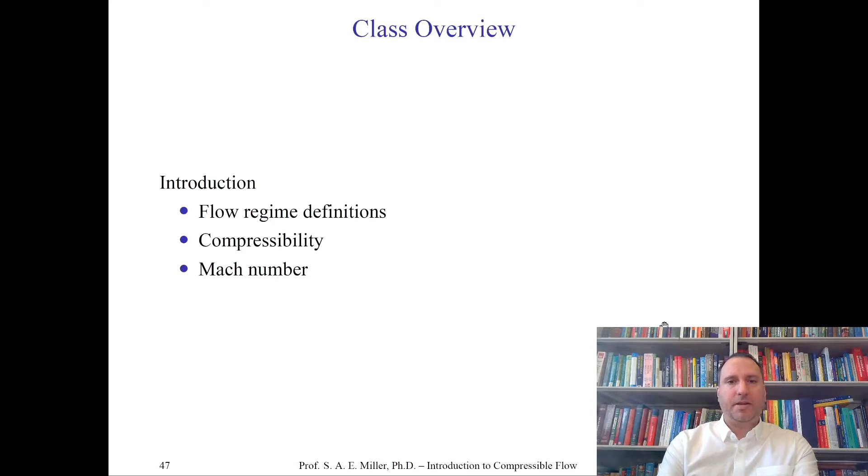It's always fun to start with a quote. Here's another one from Da Vinci, as I showed earlier. He wrote in one of his notebooks, 'Before writing on winged creatures, make a book on insensate objects that descend through the air without wind.' In other words, the laws of gravity and falling bodies. And another on those that descend with the wind, in other words, the laws of air resistance and aerodynamics.

Da Vinci was, of course, a genius, and he saw then that he would try and so-called divide and conquer a problem, to study its elements and assemble it into something more complicated. This is very much like what we're doing in this class, that we're looking at elements of very complicated flows and to understand them as a system of fluid dynamics.

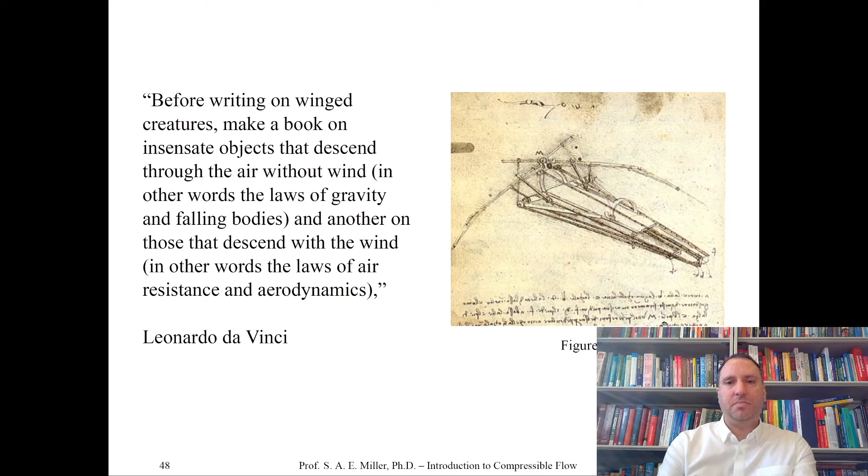So let's start at the beginning. This is a little bit of a review for some of you, and that's okay, but I'm trying to bring everybody to the same page. We first might ask, what is a fluid? Well, a fluid in this class, and most people would agree, is any substance that deforms continually under a shear stress. So we take any substance and shear it, and it will continually deform. This is what we call and consider a fluid.

Generally, there are three states of matter, in the classical sense at least, that we consider a fluid: liquids, like water; gases, such as nitrogen gas or air; and plasmas, which is perhaps a gas heated enough for the state of matter to form and for the gas to disassociate. In this class, we'll mostly look at gases. We will not be looking at plasma dynamics. We very seldom will look at liquids because the compressibility of liquids is so small. The compressibility of gases and plasmas is very, very high. So compressibility effects in gases and plasmas are high, and therefore we're going to focus on them a little bit more.

Most liquids will show almost no change in density with changing pressure. We note this from experiments, and we'll see why momentarily. For this reason, we consider, at least in engineering contexts, liquids to be rather incompressible for practical purposes. For example, if we're doing calculations, we might just assume that the density is not varying within the flow field. We would call this, in a casual manner - not the strictest definition of compressibility, which we'll talk about later - that the flow is incompressible. And that's a wonderful assumption because we can reduce the number of equations we're solving for, thus reducing the complexity of the problem. Compressible flow needs a greater insight into the problem because density varies in the flow, and we have to account for that as an unknown variable.

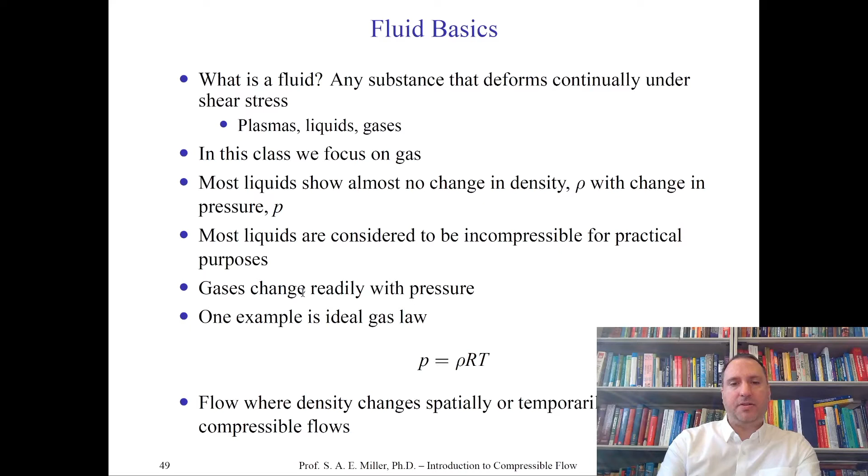Now, unlike liquids, gases readily change with pressure, P. This is something we're observing from experiment. If we can model a gas with the so-called ideal gas law, which I show in equation 1 - and all equations are numbered in this class - we can write it as P equals rho RT. Then we can also use this gas law for many other fluids. But you have to know when it breaks down. Remember, the gas law is for ideal gases, and it is a type of assumption. So we'll look at some of the validation and ranges where these different gas laws work well in this class.

So here we say the ideal gas law, which I think almost everybody's seen at some point in their career up to this point. If not, here it is. I think it's usually introduced in chemistry: P, the static pressure, equals rho, the static density, times R, the gas constant, times capital T, which we'll call static temperature.

I'll talk about static, total, and stagnation values later. Just know that P is pressure, rho is density, R is gas constant, and T is temperature. P equals rho RT - it's an equation you should remember.

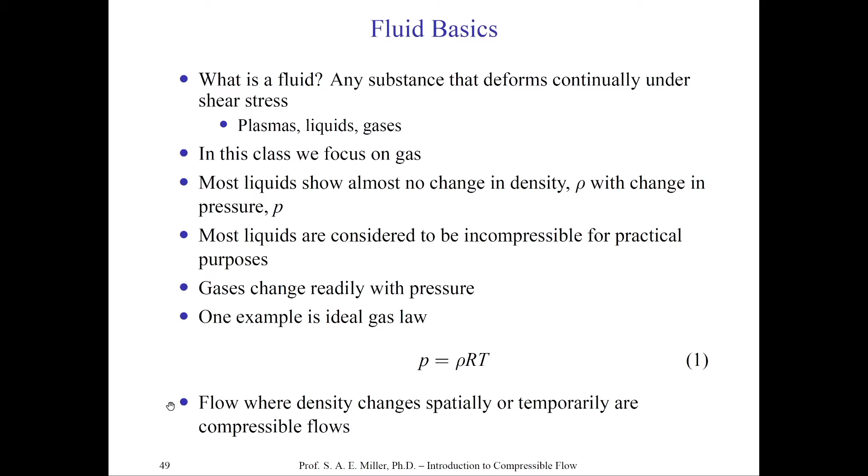Let's talk about what compressibility is. For now, we'll call compressibility and quantify it as tau, the Greek letter here. Don't think of tau too closely as compressibility in the rest of the class - it's just the formal definition here. We'll call tau as compressibility.

We'll also use tau as shear stress, which we'll also show in this introduction module. So you'll know tau as shear stress or compressibility by the context of the problem and the equation that's used. Why do we use the same variable for two different things? Tradition - it's because these two communities that studied the fundamentals of gases and fluid mechanics and dynamics came together, and they both were using tau. Neither one gave way, so we'll use tau twice in this class for two different things. It should be obvious to you which it is.

Let tau be equal to negative 1 over V times dV dP. I've already defined P as the pressure, and tau is compressibility, but V will be the volume. So the compressibility of a fluid will go as the negative of 1 divided by the initial volume, times the change in volume divided by a differential change in pressure.

So if we apply a little positive pressure, get a little positive differential, what happens to the volume? Change in volume dV, so it's dV dP - that's just a normal derivative. In this class we'll see normal and partial derivatives. You should understand already what a derivative is from your calculus sequences, and I'm sure they briefly talked about a partial derivative, and we'll briefly review that if you don't recall this.

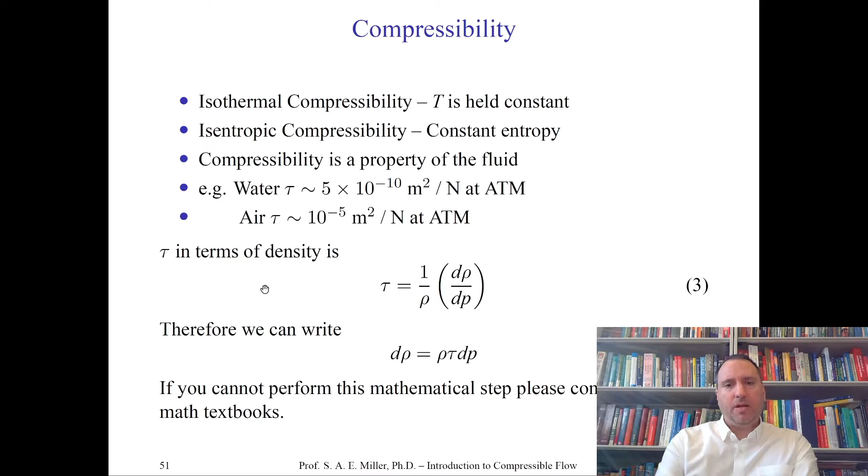We can also take equation 2 and write it in terms of density. That'll be tau equals 1 over rho times d rho dp. You can try and work out these two values yourself. This is a little easier to work with, but we have a differential form.

What if we try to move d rho to one side and dp to the other? We'll find this nice differential equation: d rho equals rho tau dp. Recall that d represents the differentials, rho is density, p is pressure, and tau is compressibility. We get d rho equals rho tau dp, equation 4. If you don't see these mathematical steps, please look back at your calculus book and your basic thermodynamics books, and you'll be able to make this exchange from equation 3. I urge you to try these mathematical problems on your own—it's the only way you're going to learn, understand, and remember it yourself.

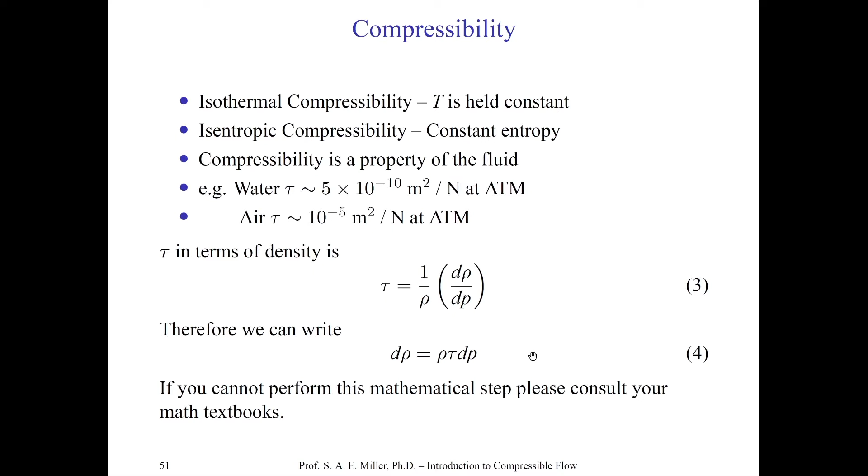Let's next look at some pressure gradients, and keep in mind these compressibility terms—they'll come up later in your homework problems. Think about how pressure gradients might change the density in the flow. Remember, the equations are linked, as we'll discuss in the next class, through a system of partial differential equations which relate pressures, densities, and temperatures to the velocities—closed by the ideal gas law. For now, let's look at some physical observations of pressure gradients in particular flows.

First, we note that most flows, especially of aerospace interest, contain pressure gradients—that is, there's a change of pressure as we move through space and time. In this case, I'm thinking in particular about how pressure changes in space. Many aerospace-type flows are driven by pressure gradients, as happens for rocket engines and wind tunnels. I'm sure you can think of other cases where a flow is driven by a pressure gradient. Then think about flows, perhaps in nature or in our lives, which are driven by, say, temperature.

Now, strong pressure gradients will create density changes, especially for a flow with high compressibility—it'll be much more susceptible to these types of changes. These density gradients become larger and larger, and we have to account for them in our calculations. This is the central thought of compressible flow theory: how we account for these density changes, which are so apparent and large in high-speed and complicated flows.

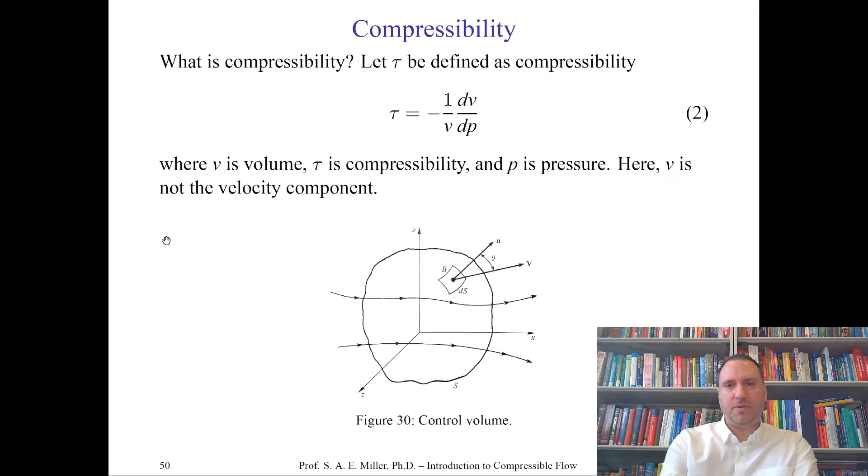Now, this is not the case in an incompressible flow, where there are pressure gradients, but the density is almost invariant, or completely invariant. Mathematically, we could just say the density is a constant, simplifying our equations like you did in your fluid dynamics or introduction to aerodynamics classes. So we could say density is a constant and not worry about the changes of pressure with density, as we showed in equation 4.

If we consider a portion on the right-hand side of the momentum equation—and you should have derived the momentum equations for fluids in your previous class, we'll review them next class—you'll have one particular term on the right-hand side. This is what's used to drive the flow. You can think of it as a type of inhomogeneous or forcing term in the equations of motion.

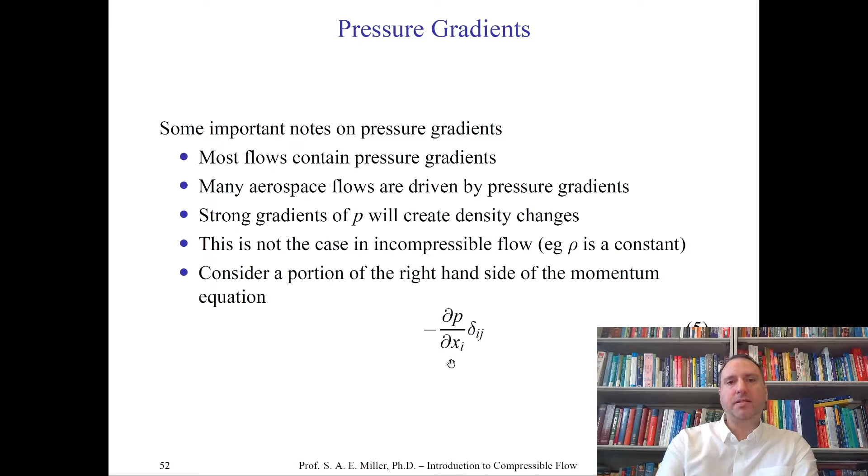Let's look at this form here. We have a negative sign, and then our first instance in this class of a partial derivative: partial p partial x sub i. P is pressure, and this symbol in front of the p is the partial symbol, so this is a partial derivative with respect to the x sub i direction. If we're in 3 directions, i would be 1, 2, or 3 for the x, y, or z direction respectively.

Then you see this curious character here. On the class website I've uploaded notation for index notation. This is delta sub ij, where i and j are the indices of this particular term in the equations of motion. Here i varies from 1 to 3, and so does j. When you see two i's, we sum them. For example, this term would be negative partial p partial x1 delta 1j minus partial p partial x2 delta 2j minus partial p partial x3 delta 3j.

Then we would set j to be the x, y, or z direction. So for example, in the x direction of the equations of motion, we have negative partial p partial x1 delta 1,1 minus partial p partial x2 delta 2,1 minus partial p partial x3 delta 3,1. This delta sub ij is called the Kronecker delta function—it's 1 when i equals j and 0 otherwise. So in the x direction in a 3-dimensional system, we would have negative partial p partial x times 1. Partial p partial y and partial p partial z would essentially be 0 because the Kronecker delta function would be 0.

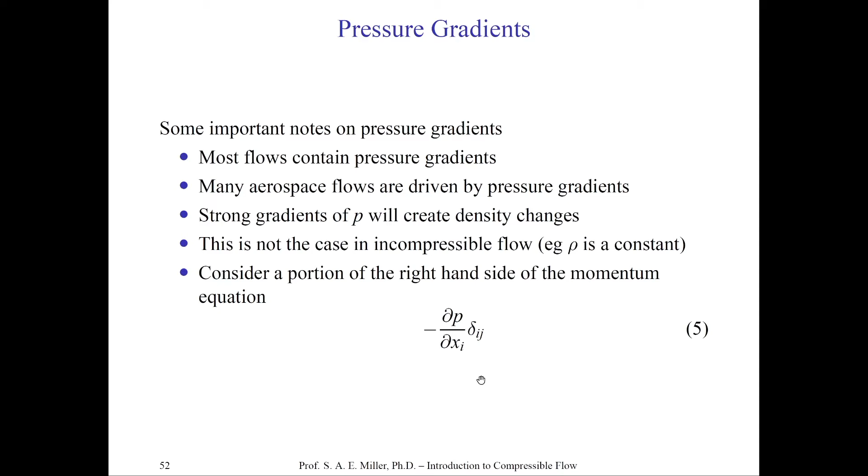Let's next look at Mach number. Let's define Mach number as shown in equation 6. We'll call it M, Mach number in this class, with subscripts to denote what kind. It's defined in general as the velocity of a gas divided by the speed of sound. Mach number can be defined as any type of velocity, typically of a fluid, divided by some reference velocity. We'll call the gas velocity generally a vector or value u, a velocity usually in the x direction, divided by the local speed of sound c.

Now in this class we will usually call the speed of sound c, but some people prefer to use a. Either way, we'll concentrate on this definition—I try to usually use c. So when you see c, think speed of sound, and it's the local speed of sound. For example, in some flows, since density and temperature change, temperature is very much related to speed of sound—in fact, the speed of sound goes as temperature to the half power in ideal gases. So our Mach number goes as u over c, remember that. Here u is the velocity and c, or a, which we can use interchangeably, is the local speed of sound.

Now if I add an infinity in the subscript to M, I call that the global Mach number. Say we have an aircraft flying through the atmosphere—far away from the aircraft is the global Mach number. The global Mach number is also considered the aircraft Mach number, which would be the speed of the aircraft divided by the ambient speed of sound—the speed of sound very, very far away from the aircraft.

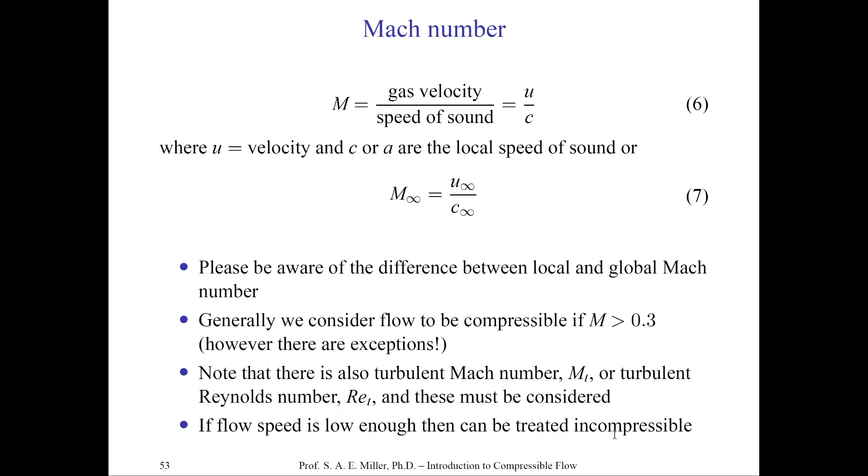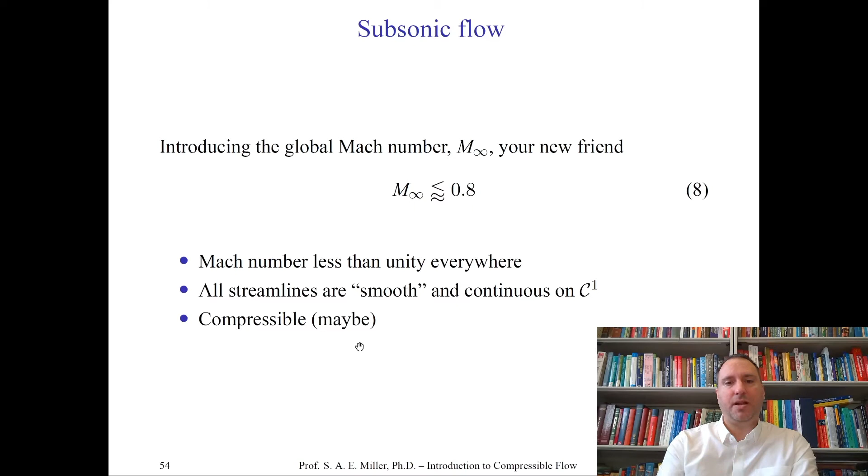Now let's look at some flow regimes. This is fun. For subsonic flow, the first flow regime - these are rules of thumb, not hard cutoffs - as a global Mach number, say we have an aircraft flying lower than Mach 0.8. So if we have a Mach 0.4 global Mach number aircraft, you can probably treat it as subsonic flow, but it could still be compressible. So you can have compressible subsonic and supersonic flows. If we find the flow field solution around such a vehicle, we could say that the Mach number will be less than unity everywhere - that is, M is less than 1 everywhere. If we plot the streamlines of that flow, remember these are lines parallel to the vector field, they will be smooth - their first derivatives will be continuous. Remember, these flows can be compressible or incompressible. We'll look at examples of these soon.

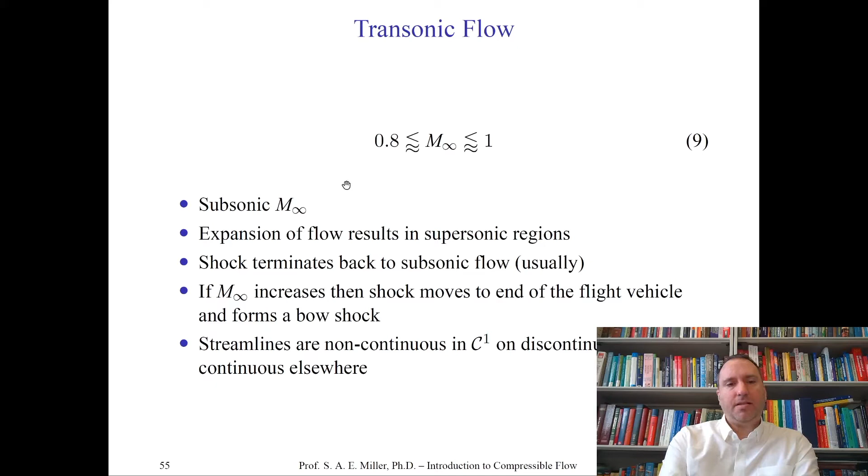Let's look at a transonic flow next. A transonic flow might have Mach numbers in the rough range between 0.8 and 1, where the Mach number everywhere is in this range. It's also considered a subsonic flow - that is, we'll find a subsonic M infinity, where the global Mach number of the device flying through the gas is less than 1. But there could be regions of the flow which are supersonic, meaning M is greater than 1, and we could see shock waves starting to form. A transonic flow is usually an incoming subsonic flow which accelerates to be supersonic, and terminates and returns to subsonic flow through weak shock waves. Now, if the Mach number increases more, the shocks will move to the end of the vehicle and form bow shocks, like we showed in the introductory first class when looking at simple visualizations of Schlieren. You also find in a transonic flow, unlike a subsonic flow, that the streamlines are non-continuous in their first derivative, and at their discontinuities, they turn abruptly.

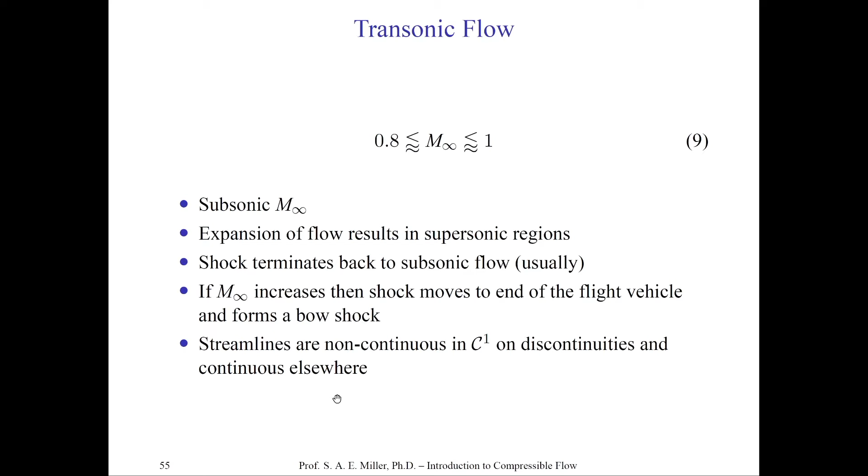Streamlines are non-continuous on particular flow phenomena, like a shock wave, and continuous everywhere else. This is just a general definition in transonic flow, and we'll talk more about the mathematically rigorous definition near the end of the class. For now, just try to get an idea of what the flow regimes are.

Next, we have supersonic flow, where M is greater than 1 - that's the global Mach number, M sub infinity, greater than 1. So if a flight vehicle is flying at Mach 2, we'd say M infinity equals 2, which is greater than 1, therefore it's supersonic flow. Here the flow everywhere is greater than 1, but this isn't a rigorous definition, because a supersonic aircraft could be flying at Mach 2 and have subsonic flow in regions around it. We'll just generally call this a supersonic flow regime. These are not hard cutoffs, just rules of thumb to describe types of flows, and we'll use them throughout this class. This is the language of the field.

What makes supersonic flow unique is that everywhere in front of the flow will be unaware of the shock. This is what we call a hyperbolic type system of equations, where information only travels in one direction. The flow will be unaware of shock waves until it arrives there. You'll see this more in our mathematics through the class. If you don't completely understand that point for now, it's okay.

Flow after the shock wave could be very much aware of it, since it went through it, but it could also be subsonic or supersonic after a particular shock wave. We'll look at these in the shock wave theory part of the class. There are tremendous mathematical difficulties when dealing with supersonic flow relative to subsonic flow, because of these discontinuities in the solutions and the fact that they're shock waves.

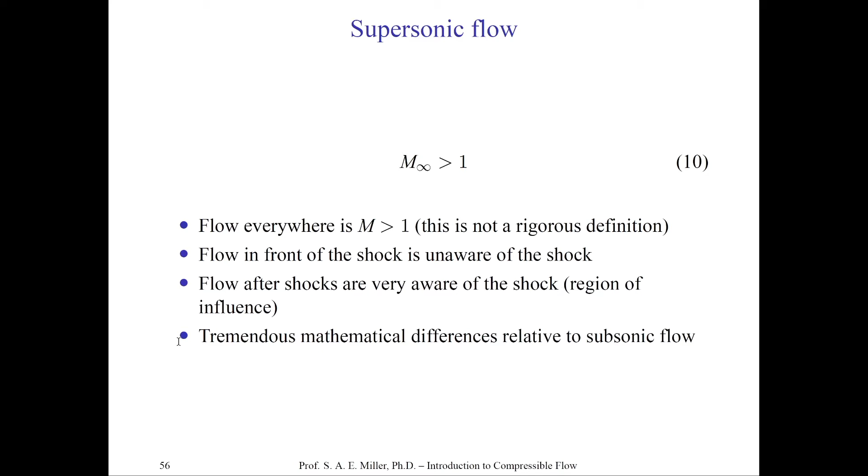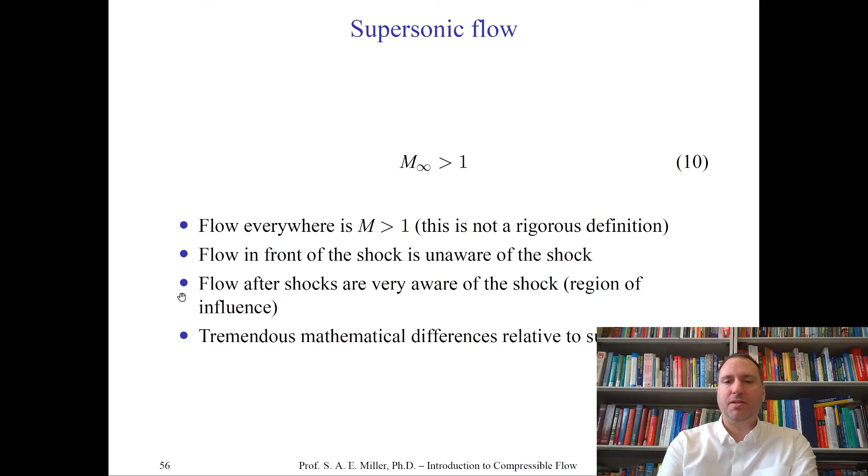Compressible flow theory in this class will be simplified, and some students might think handling supersonic flow is less complicated than subsonic flow, especially if it's incompressible. I assure you this is not the case - unique flow phenomena happens in compressible flows that does not occur in incompressible low-speed subsonic flow. So generally, supersonic flow will be that flow which has a global Mach number greater than 1 and has these general properties, but these are rules of thumb, not a rigorous math definition.

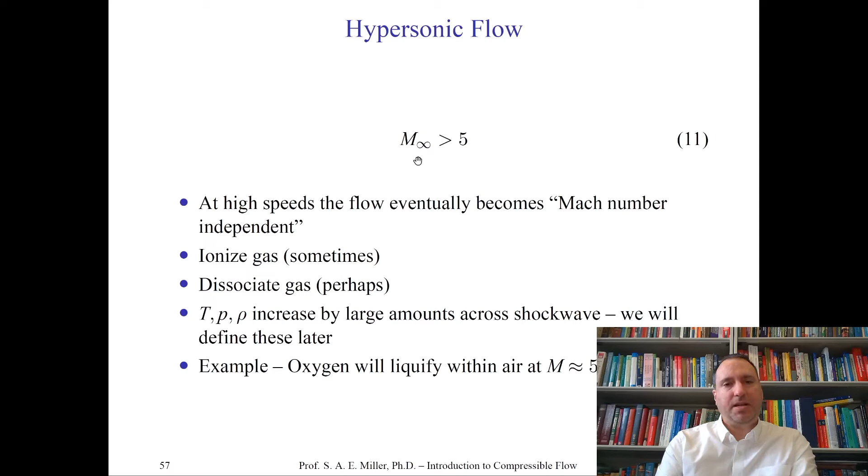Just learning language. Finally, when a vehicle, like a reentry vehicle in the atmosphere, reaches a very, very high Mach number - say at least 5 or larger, that's the community standard - if the Mach number is 5 or larger, we call that a hypersonic flow. So M infinity is greater than or equal to 5. At these high speeds, eventually the flow becomes Mach number independent, and we'll look at Mach number independence later in the class.

Remember, we can use Mach number, a non-dimensional number, to characterize flows and try to non-dimensionalize the solutions and collapse them to find similarities. These break down, and Mach number becomes useless at very high speed hypersonic flows.

In hypersonic flows, if you have high enough Mach number for a particular vehicle shape, the gas may ionize and the gas may dissociate - like the space shuttle reentry you saw earlier. Plasma dynamics is also important in, say, fusion reactor designs, for example from ITER, the Department of Energy. It's a very interesting field. We will not be looking at plasma dynamics in this class, but it's a wonderful research area to go into, especially if you're scientifically and mathematically minded.

Plasma also occurs in both aerospace engineering and other fields. One thing you'll notice in a hypersonic flow is the static temperature, pressure, and density increases by huge amounts across a shock wave, and we'll define these increases later. In any shock wave, you'll notice the temperature T, the pressure P, and the density all increase - these scalar thermodynamic values increase immensely across shocks. We'll find mathematical solutions for these in this class, and I think you'll find it quite elegant.

One example of a hypersonic flow which gives people great difficulty is that oxygen will liquefy from air near Mach 5 in a wind tunnel. So if you're doing wind tunnel experiments at Mach 5 or greater, you can expect to have these types of difficult effects to deal with.

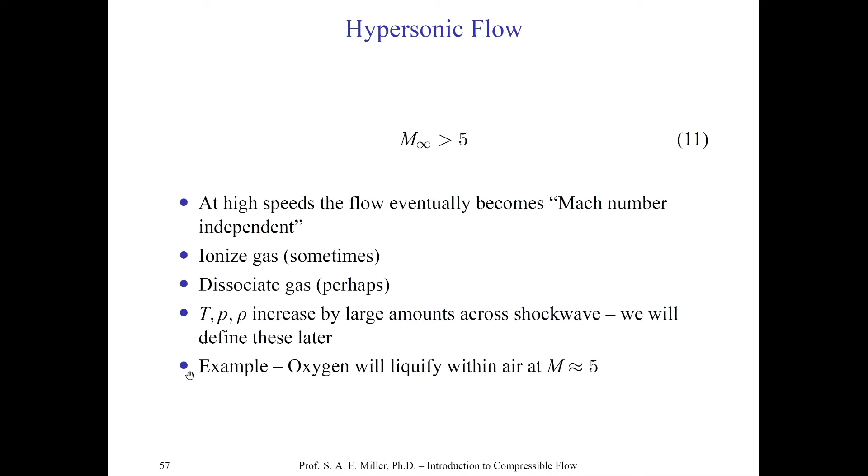The last flow regime I want to talk about today is the so-called hypervelocity flow. This is where you have a Mach number of 20 or greater, anywhere in 20, 25, and greater. The shape of the vehicle will also come into play here, as you'll see later near the end of the class, for what we call hypervelocity flow. But it has these general characteristics.

One, the flow will be rarefied, and we'll talk about what that means soon. The continuum assumption breaks down, meaning we can no longer treat the fluid, in this case a plasma or gas, with standard mathematical assumptions. The Navier-Stokes equations become invalid, though they could still be good approximations. In this class we're assuming mostly continuum phenomena, non-rarefied flows, but for rarefied flows we need special tools, through the Boltzmann equation and Monte Carlo type methods.

A rarefied flow is a flow where we're dealing with particles that don't have a high density and are moving very fast. We will talk about hypervelocity flow a bit near the end through the original approach to aerodynamics proposed by Sir Isaac Newton. I think you'll find that very interesting.

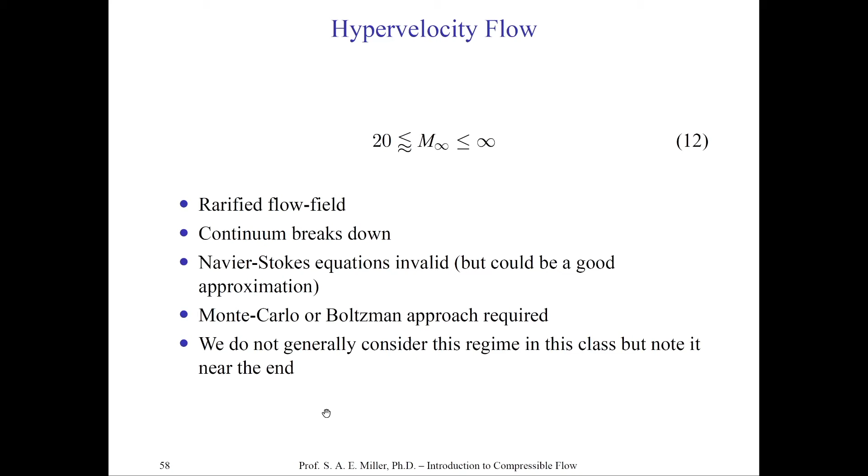Now let's look at some examples of airflow going through these different flow regimes. The first example shown is a subsonic flow over an airfoil. The airfoil, this solid body, is the outline with diagonal lines going through it, and from left to right we have streamlines. In the subsonic definition, the streamlines are continuous through the flow field solution, so at some point B we have a velocity vector which is parallel to this particular streamline.

We could draw these streamlines anywhere in the flow field if we wanted. You also see one particular streamline comes in from left to right and stagnates at the leading edge of the flight vehicle, in this case an airfoil. So flow moves from left to right, the airfoil is stationary - it's not any different than sitting in an aircraft and looking out the side of the wing.

The incoming velocity we'll call v sub infinity, the velocity of the aircraft or flight vehicle, which is the velocity of the incoming airflow. M sub infinity is the global Mach number, and it's less than 0.8, for example, for subsonic flow. Along all these streamlines the Mach number varies, but we say it's always less than 1 - everywhere in the flow field around the airfoil, the Mach number is less than 1.

This is the stagnation point, which we'll talk about later in the class. This is where the flow comes in and stagnates at, say, a leading edge. This is often one of the highest temperature points on the vehicle, which could be important at high speeds. So you'll see all the streamlines are continuous in this particular form.

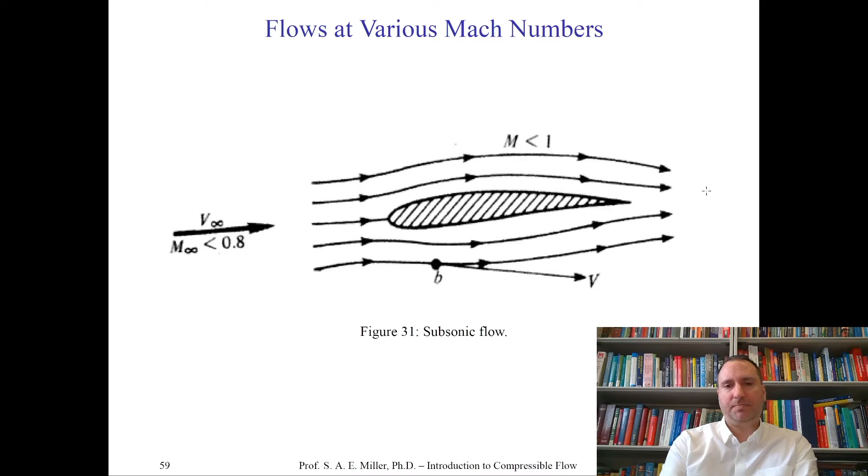But remember from your previous classes that along the streamline, Mach number actually changes - why? Because it's compressible. We're treating it as incompressible here, but let's say it's probably compressible at around Mach 0.8, M infinity. The flow will accelerate - it might be Mach 0.8 here, maybe 0.9 here, and it decelerates back behind the vehicle to, say, Mach 0.8 eventually. Still subsonic. In transonic flow, something different happens.

This is the transonic flow regime, and it's very physically non-intuitive. For this particular airfoil, the transonic regime goes from global Mach number 0.8 to 1. The flow goes from left to right, same airfoil. Along the bottom, the Mach number never increases beyond 1. But what about this streamline?

Let's say we're about Mach 0.85 here, and we accelerate, still subsonic. Then something happens at this point on this dashed line - the Mach number goes transonic, m equals 1, and accelerates to a supersonic speed. At this location where my cursor is, that's a supersonic Mach number. Then we go through this thick line here, attached to the vehicle - that's the shock wave, which we saw pictures of in the previous class.

Across the shock wave, almost instantaneously as we move from left to right, our little fluid element goes from Mach greater than 1 to less than 1, to subsonic speeds. Then we decelerate, or accelerate a little bit, but then decelerate back to, say, Mach 0.85, the global Mach number. As we change M infinity, the position of the shock wave will move around the vehicle, and it terminates so it can match the back pressure of the atmosphere and the flow. The dashed line here signifies the transonic condition itself, where m is exactly equal to 1.

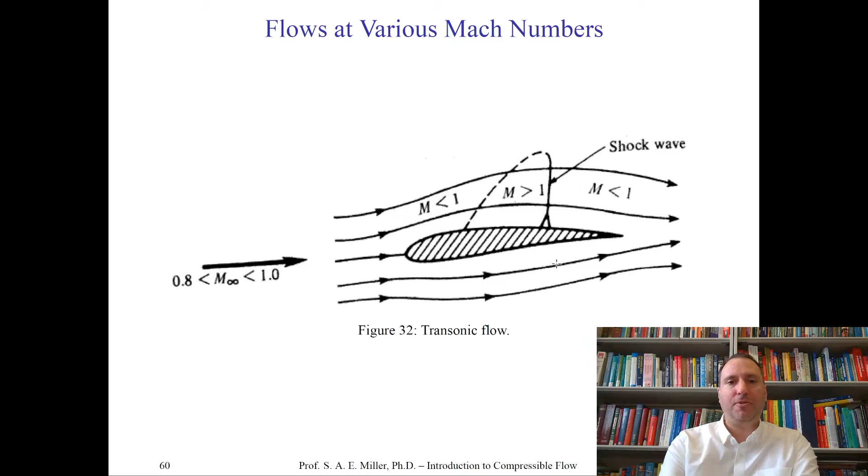Why doesn't a shock wave form on the bottom side of this particular airfoil? Well, it's the shape—this airflow down here is never accelerated to a supersonic regime for a transonic shock wave to form. This is all physical observation, and we'll talk about the mathematics through the equations of motion to explain all this. Right now I'm just trying to show flow regimes. So I'm sure you're wondering, with a lot of questions, like what is a shock wave? Why does this happen? Well, we'll try to answer these questions in this class.

Let's look at another transonic problem, and this time we'll define the global Mach number as from 1 to, say, 1.2. Here, since the incoming Mach number is greater than 1, and we do not have a pointed leading edge—the leading edge is bluff—a bow shock will form.

So all the Mach number, say here m infinity is 1.1, hits the bow shock, goes through the shock wave, and immediately the Mach number becomes subsonic. And we'll prove this to you in this class. If you go through a shock wave, your Mach number, for a normal shock at least, will become subsonic.

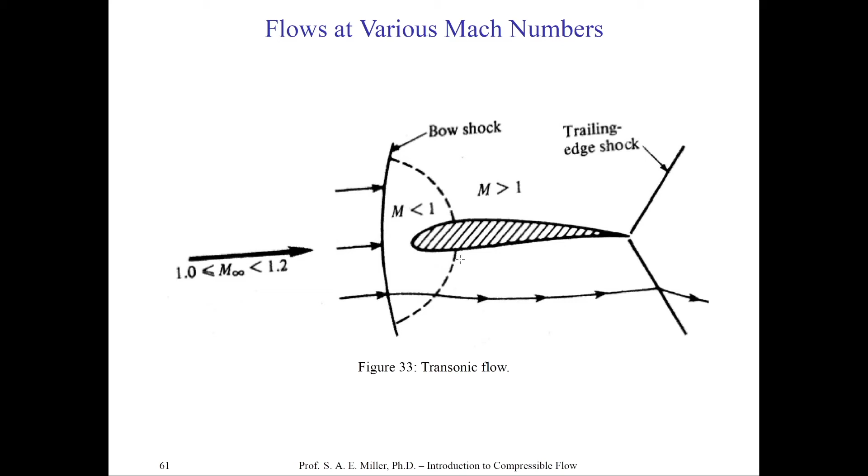The flow then accelerates around the body, becomes supersonic again, and a trailing edge shock forms at the end of the vehicle. So this is a supersonic incoming flow, but it's considered transonic. Why? Because this has transonic features of a bow shock and trailing edge shock, and there are regions of the flow which are, of course, supersonic and subsonic.

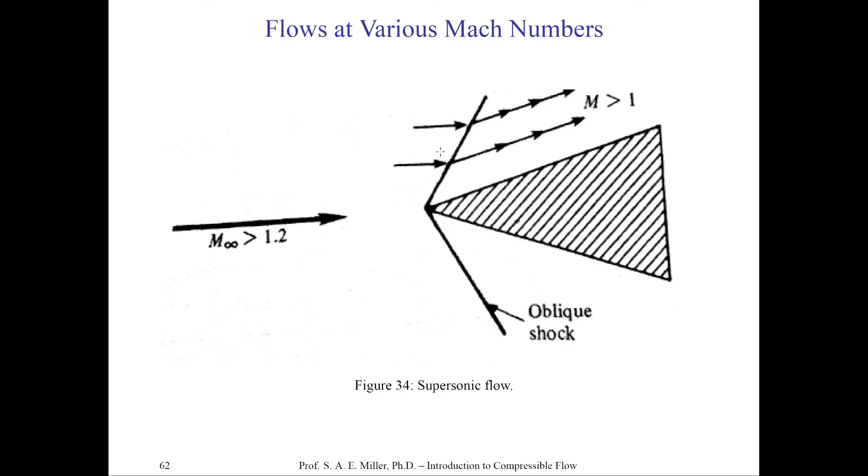But this is all qualitative, and we'll try to quantify these definitions later and put it on a more firm theoretical and mathematical basis.

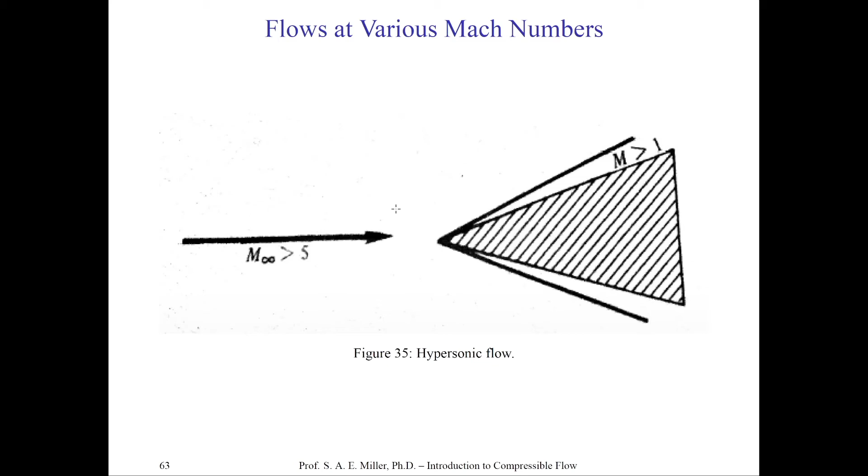hypervelocity flows, where the flow becomes rarefied, and we have to handle it with something like the Boltzmann equation and Monte Carlo type methods, which are statistical methods.

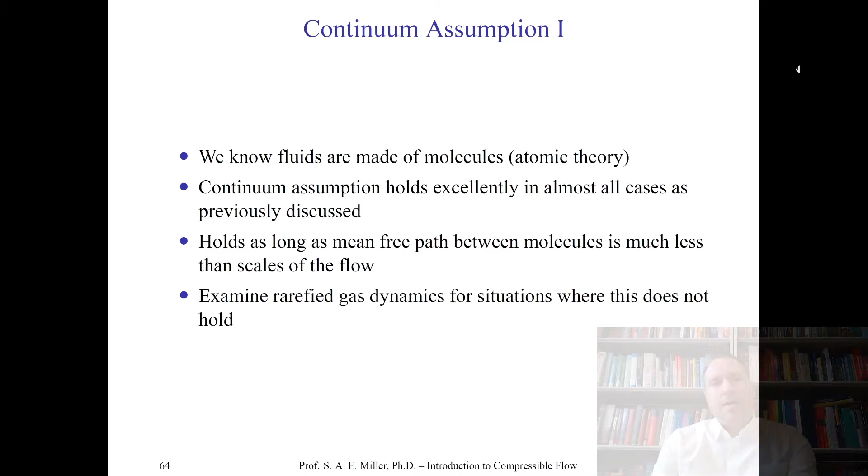The continuum assumption holds as long as the mean free path between the molecules is much less than the scales of the flow. For example, we'll estimate the scales of the flow as some distances and times—those are scales: the length, time, and velocity scales, for instance.

And the mean free path—that's the average distance between the molecules—will be much smaller than the length scales of the flow. Then we can consider it a continuum. And we'll do this mathematically in a few minutes.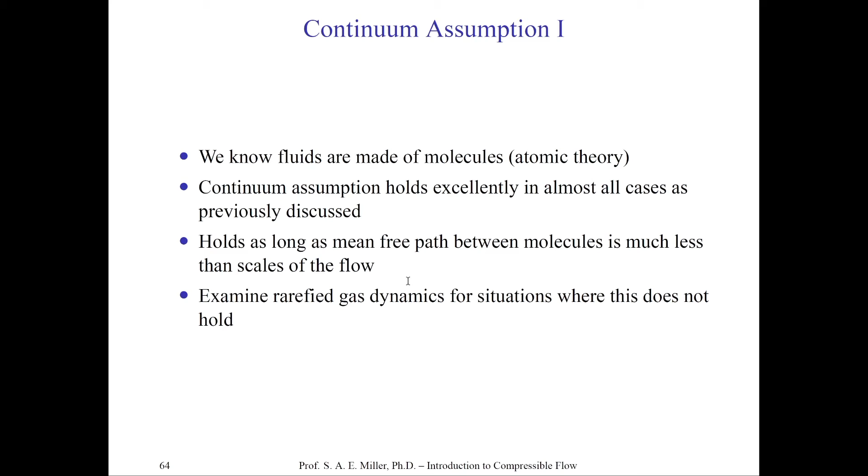We would have to look at a whole new field called rarefied gas dynamics to handle situations where the mean free path length scales are on the same order or larger than the scales of the flow itself.

Now, most aerospace flows that we'll consider are considered to be Newtonian. Here we'll define this relationship. This is unlike the compressibility equation which we introduced earlier in this class.

Here we'll say tau is a shear stress, the shearing of the fluid, and a fluid deforms continuously under shear. This will be approximated as the viscosity times the derivative of u with y. This is a simple definition, not the full shear stress tensor, just for observation.

Newtonian fluids, liquids, gases, or plasmas, are defined where the relationship is linear between the shear stress and the viscosity, and of course, the shearing of the fluid, du/dy. This is a derivative of, say, u, the streamwise velocity, in the cross-stream direction y.

Mu is a constant in this case, but it's often good to say there's a model for mu, which is viscosity, which goes as temperature. So it's like Sutherland's law.

Now, non-Newtonian fluids are much more difficult to handle. Can you think of some examples of non-Newtonian fluids? Two would be, say, honey or ketchup. So in our everyday lives, when we're dealing with honey or ketchup, we're dealing with non-Newtonian fluids.

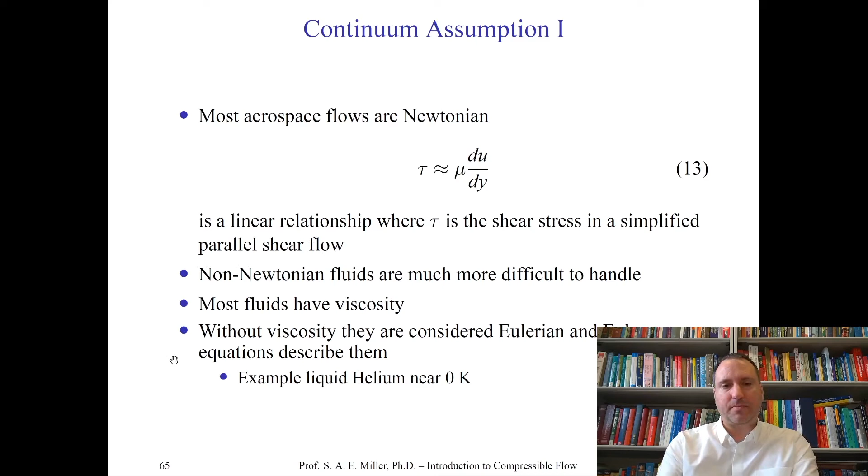His title, Kelvin, which is also a unit of temperature, is named after the River Kelvin, and you can use Google Maps and look at it yourself if you wish. It flows by his lab at the University of Glasgow. Can you imagine being referred to as Baron Kelvin, named after a nearby river? You can probably think of some examples right here in our state. He wrote over 650 articles and 70 patents. That's an amazing amount of productivity.

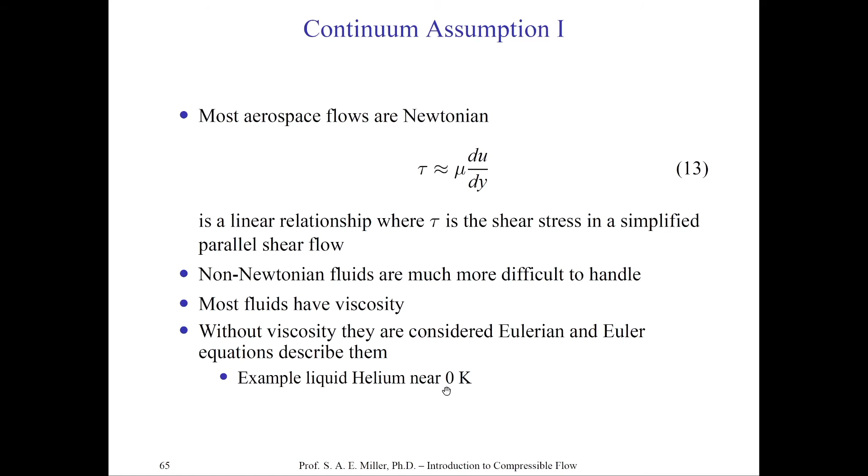He has an interesting quote, which I'll stop and share to take a break from the technical material. He wrote: 'In physical science, a first essential step in the direction of learning any subject is to find principles of numerical reckoning and practical methods for measuring some quality connected with it. I often say that when you can measure what you are speaking about and express it in numbers, you know something about it. But when you cannot measure it, when you cannot express it in numbers, your knowledge is a meager and unsatisfactory kind. It may be the beginning of knowledge, but you have scarcely, in your thoughts, advanced to the stage of science, whatever it might be.'

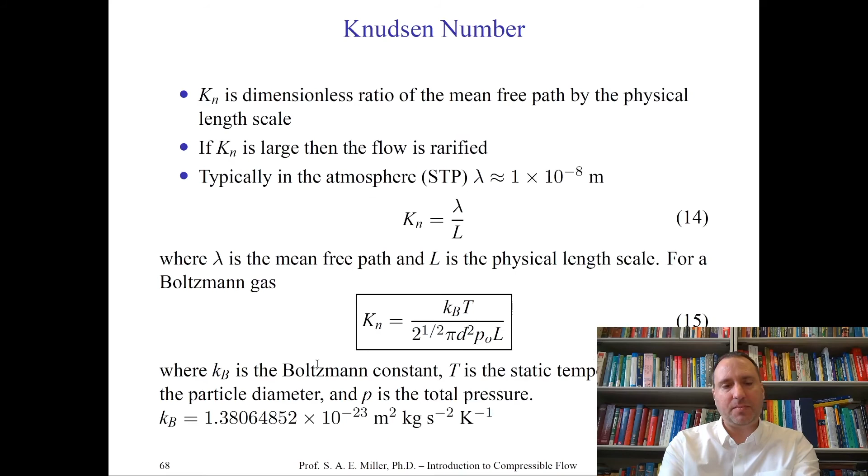Let's start with this quantification with the Knudsen number, named after another famous person. We'll call it Kn. Kn is a dimensionless ratio of the mean free path by the physical length scale.

I'm introducing this now because we've already talked about what's rarefied or not, and we have to decide if our problem is a rarefied flow or a continuum flow so we can apply the correct equations. I've already told you the qualitative outcome: if Kn is large, the flow is considered rarefied; if small, it's continuum. Typically, Kn less than 0.01 is considered a continuum flow.

In an atmosphere at standard temperature and pressure (STP), the mean free path will be 1 times 10 to the negative 8th meters. Lambda here is the mean free path, which I defined a few slides ago. L is a physical length scale, meaning a length scale of the flow, like a turbulent length scale. You'll have to know these length scales for particular flows to calculate the Knudsen number. I've given you an example problem in your homework to try it yourself.

Now, using Boltzmann gas definitions for lambda and L, we can define the Knudsen number quantitatively: it's the Boltzmann constant Kb times temperature, divided by 2 to the half power times pi times d squared, where d is the particle diameter, times p naught, the total pressure in the flow. We'll talk about the difference between total and static pressure later.

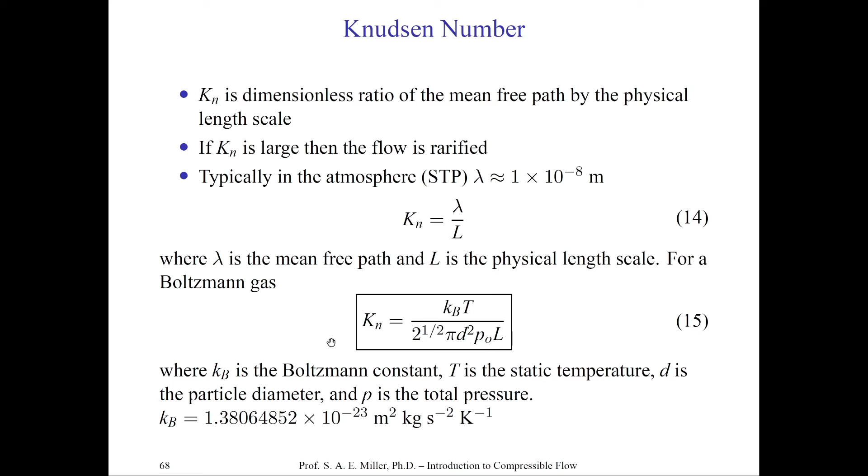This is how we define the Knudsen number, the general non-dimensional parameter. Kb is the Boltzmann constant, which we'll talk about in a bit: 1.38064852 times 10 to the negative 23rd meters squared kilograms per second squared per Kelvin. I'm sure you found this number in your chemistry classes. Here it comes back again, in the wonderful world of fluid dynamics, measuring whether a flow is rarefied or not.

Let's look more at the Knudsen number and try to relate it to Mach number so we don't have to worry about that scaling issue as much. Our goal is to relate Mach number and Reynolds number through the Knudsen number Kn. So we'll define a molecular average speed, c bar.

This is very much like the speed of sound, but now as a parameter we're calling the molecular average speed, c bar, which goes as the square root of 8 times the Boltzmann constant times temperature divided by pi m, where m is the molecular mass. The mean free path can then be written, through substitution, as lambda equals mu, the viscosity, divided by density rho, times the square root of pi m over 2 times Boltzmann constant times temperature.

If you look at this equation and you're keen, you can divide both sides by L and write Mach number as u over c, where u is velocity and c is speed of sound. But instead of speed of sound, we'll use the mean molecular average speed as c equals square root of gamma kB T over m.

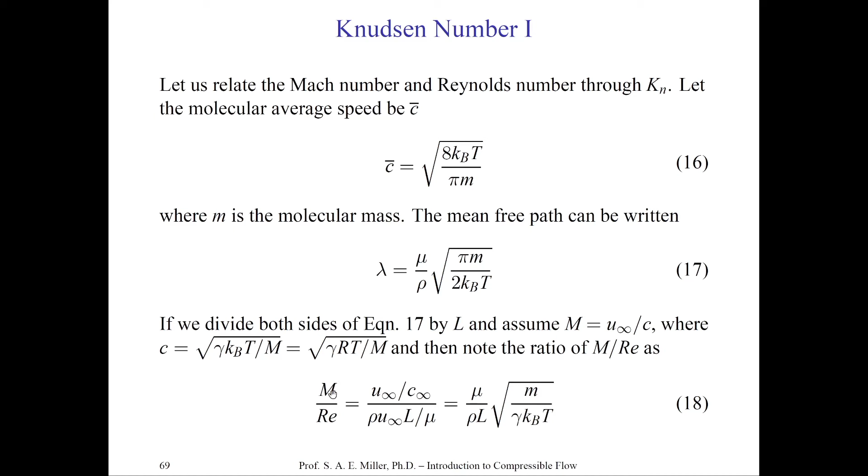We get that Mach number divided by Reynolds number goes as mu over rho L, where mu is viscosity, rho is density, L is the length scale, times the square root of m, the molecular mass, divided by the ratio of specific heats gamma, times the Boltzmann constant Kb, times temperature T in Kelvin. Now we have an interesting relation, but we're not done with our original goal.

If we multiply the right-hand side by gamma pi over 2 to the half power, we obtain a form that relates the Knudsen number through the earlier equations.

And we'll get mu over rho L square root of m over gamma kB T times square root of gamma pi over 2, which is a wonderful and pretty constant. We can then simplify this using our definition in equation 18 to equation 20, and we'll get Kn, the Knudsen number, goes as the Mach number divided by the Reynolds number times gamma pi over 2 to the half. You can see that in these two terms, gamma pi over 2 to the half came down here, and this is really m over Reynolds number, as you saw from our previous equation.

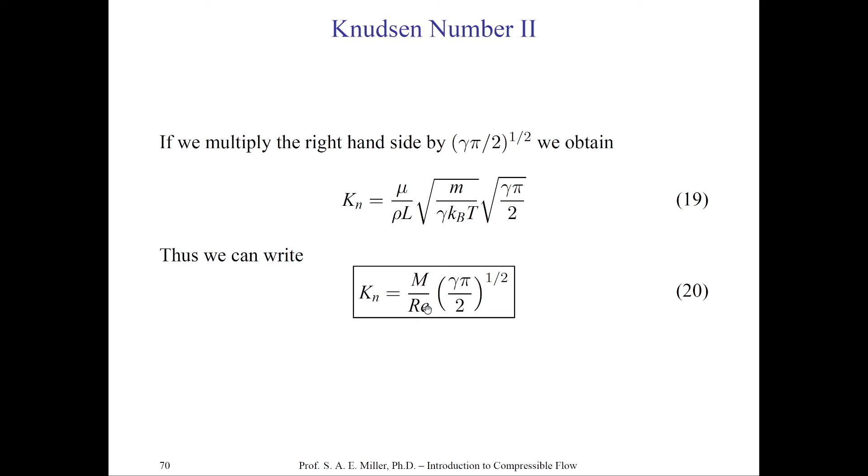At this point, I strongly urge you to try this out for yourself, and you'll see the connection between Knudsen number, Mach number, and Reynolds number.

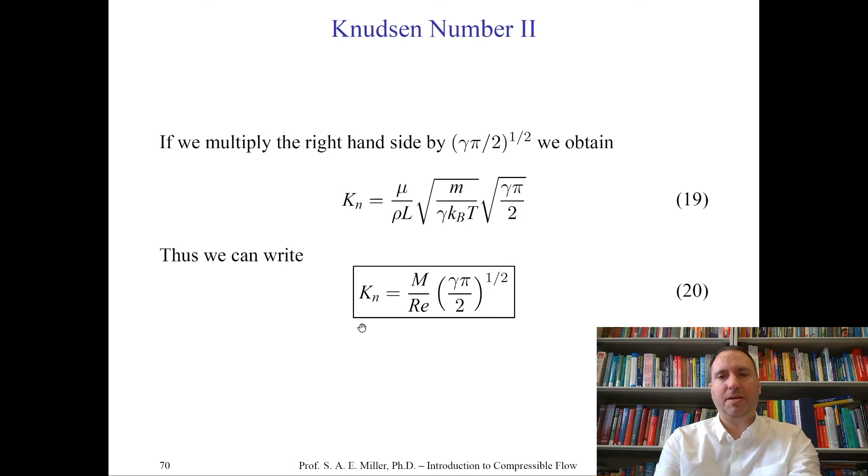So almost everything we do in this class is applicable to all situations, except for the rare case. You can use this wonderful non-dimensional equation, which relates three of the most important non-dimensional numbers for checking continuum, Mach number, and Reynolds number. Think about different cases in real life, say applications where Mach number and Reynolds number change, and try to calculate how Knudsen number changes. I think you'll agree with me, it's a wonderful tool to have.

Now let's make some notes about what I just said regarding Knudsen number. For Kn greater than 10, we should treat the flow as rarefied. Otherwise, we will treat the flow using statistical and continuum mechanics, which is the focus of our class. Thankfully, almost all flows that we are interested in as aerospace engineers are treatable as statistical and as a continuum, except for high altitude, high Mach number reentries.

Also note that turbulence is by definition a continuum phenomenon. So if Kn is greater than 10, you should not have to worry too much about turbulence. This is wonderful because the turbulence problem is the most difficult part of the problem. So for high-speed rarefied flows, you don't have to worry about turbulence because it's a continuum phenomenon. That's wonderful in itself and an advantage. So the harder problem is actually high Mach number and high Reynolds number, and low Kn, because it supports turbulence at high Mach number and high Reynolds number.

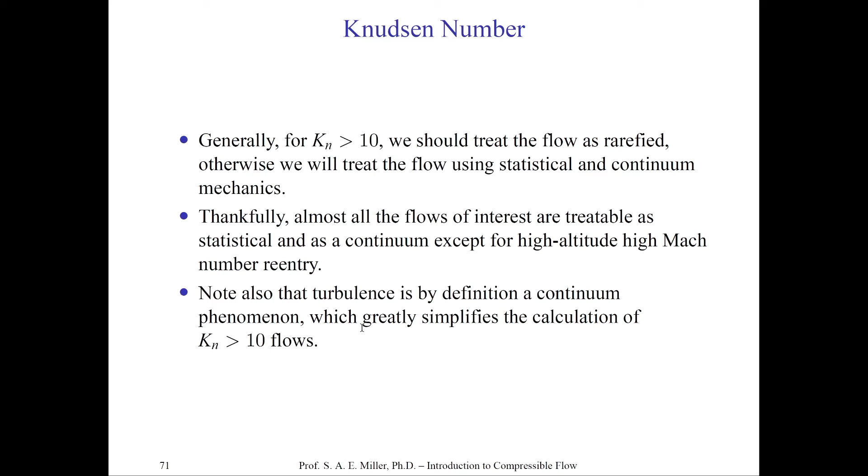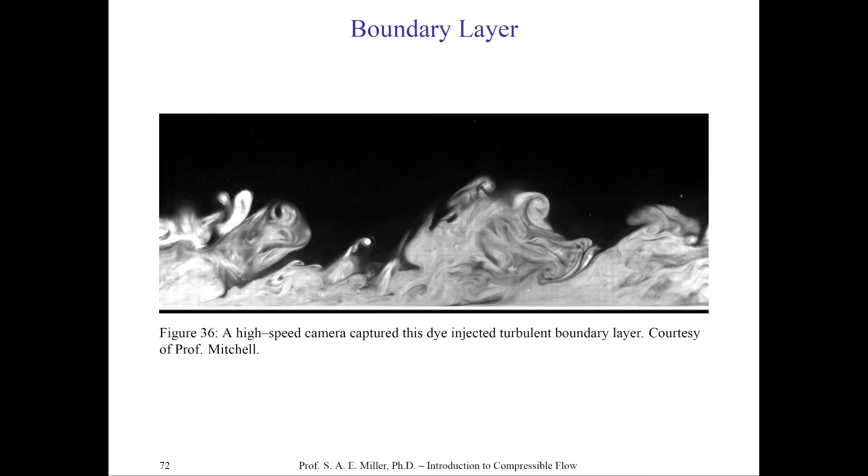You can see the flow is moving from left to right while his camera stays still. He takes pictures, and this is the actual relatively low turbulence intensity turbulent boundary layer. This is very close to the wall of the tunnel, and you can see it's very rich with all kinds of strange and interesting and aesthetically pleasing turbulent structures like eddies and vortices and tubes and roll-ups and all these things. I'll show a few movies so you get an idea what it is. This turbulent boundary layer only exists if it's attached to the wall, very close to the wall.

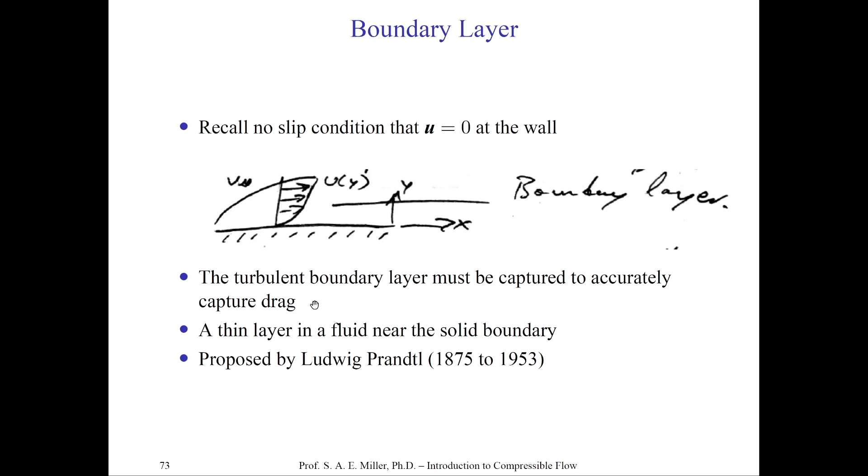A boundary layer can be laminar or turbulent. It's the fluid and its behavior very close to the wall. It must always be captured and predicted accurately to calculate the true drag of any type of device moving through a fluid. There are whole classes and books on boundary layer theory. It might be viewed in a simple definition as the thin layer of fluid very close to a solid boundary, that is, in this case, the wall.

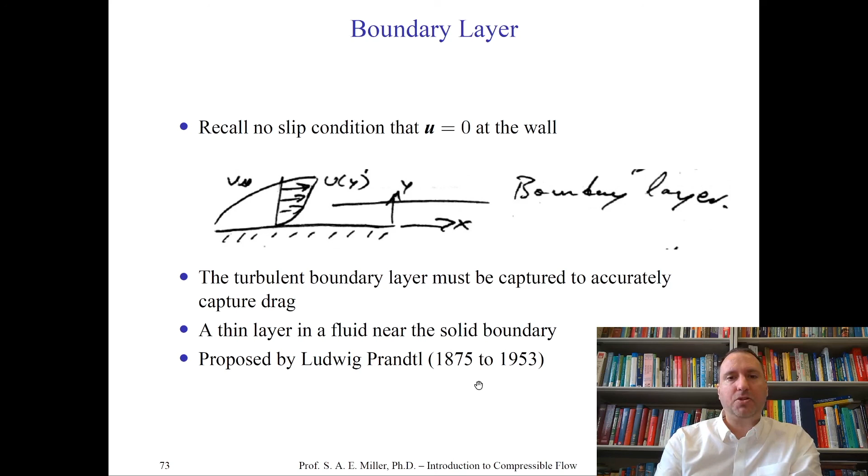The boundary layer concept was first proposed by Professor Ludwig Prandtl, who lived from 1875 to 1953. I believe it was in the early 1900s that he wrote a conference paper and presented the idea of the boundary layer. Certainly he should have won a Nobel Prize for such a brilliant idea, but they cannot award Nobel Prizes to people who've passed on by the time his idea came to fruition.

Generally in this class, we will only look at the boundary layer problems of compressible flow a tiny bit, but I promise we'll return to it again and look at it in more detail.

Let's note some differences between incompressible and compressible flows. In incompressible flows, generally the unknown variables we need to solve for are the pressure P and the vector U. In 3 dimensions, U is a vector with components U, V, and W, written bold to indicate it's a vector. Why is this? Because we only have to account for the continuity equation and the momentum equations.

In a compressible flow, density varies, and you'll see this through the equations of motion which we develop in upcoming classes. We need to account for density because of its variation. When we make the incompressible assumption, we can say density is constant and get rid of it from the equations of motion, so they simplify. The compressible flow problem itself is more difficult because you have more variables.

So usually there are 4 major unknowns, if you count the vector as a single unknown, in a compressible 3-dimensional flow: the pressure P, the velocity components U, V, and W, the temperature T, and of course density rho.

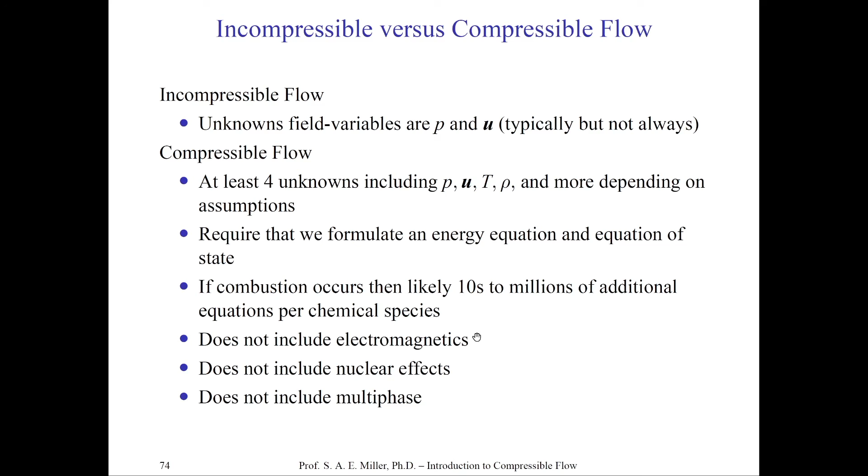We're not including electromagnetics. Electromagnetic waves can affect and alter fluids, and that's a whole field called magnetohydrodynamics, which would require many more additional equations and terms, usually factored into the Maxwell equations.

We are not dealing with nuclear effects. For example, if we're in a fusion or fission system, we're not accounting for that, which requires additional equations. And we're not dealing with multi-phase flow in this class, where there are phase changes of liquid to gas and vice versa, or plasmas within a single flow, which requires additional complexities and equations.

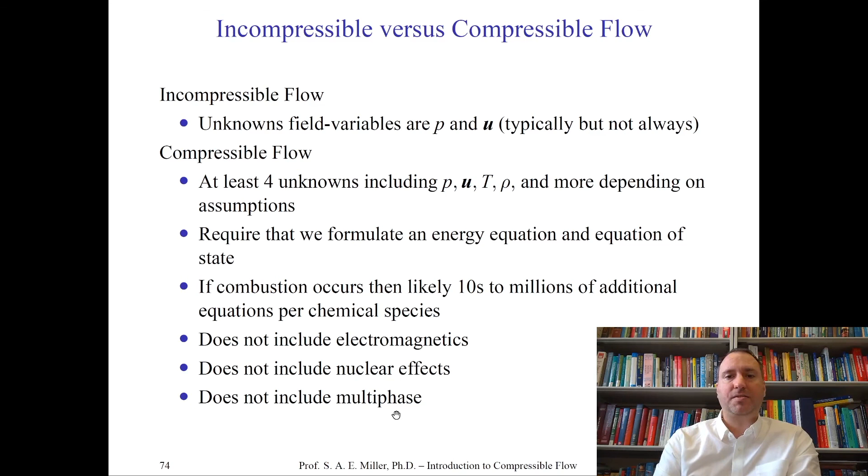So in this class, I want you to be very clear about what we're focusing on: single phase flows without electromagnetics, electrical effects, nuclear effects, and without chemistry or combustion. The problem is so complicated that I think you'll appreciate the multiphysics that happens when we do need to account for those other effects. So we need to learn to walk before we can run.

In this class, we looked at a number of flow regimes: subsonic, creeping, supersonic, transonic, hypersonic, and hypervelocity. We defined compressibility and talked about compressibility effects at different speeds. We discussed Knudsen number and derived the important Knudsen number relation between Mach number and Reynolds number, and talked about their ranges of validity.

We then talked about Mach number and defined it: the global Mach number, local Mach number, turbulent Mach number, and don't forget Reynolds number and turbulent Reynolds number. If you don't remember Reynolds number definitions, please visit your previous classes to see their derivation and importance, and if you want, we can talk about those one-on-one.